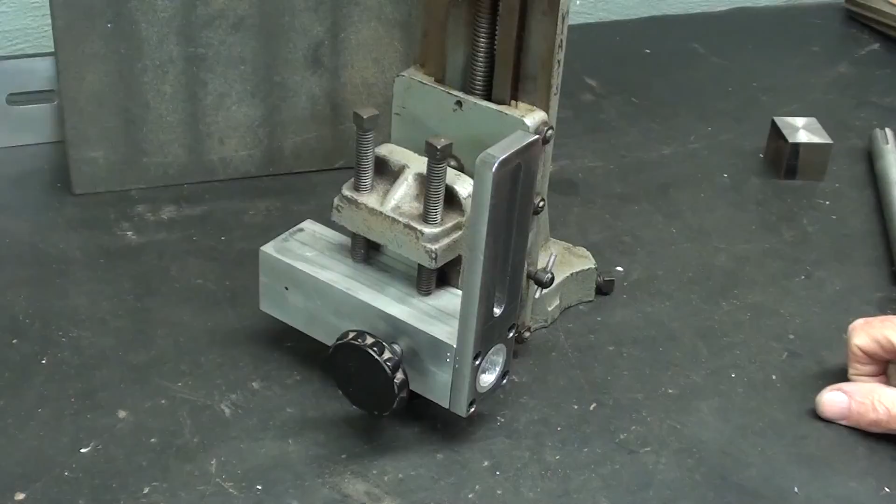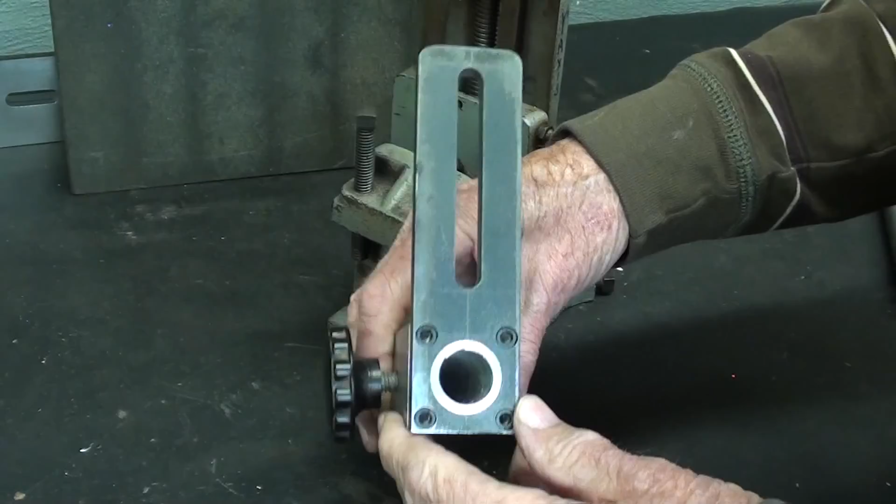Here is the partly finished project. I've done 2 parts, so this is part 3. I made the housing in part 1, and the slide part in part 2. Today there's about 3 or 4 more parts to make, but I'm going to make the block that slides in this slot, as well as the clamping mechanism on the back side. So there's 2 little projects in one in this video.

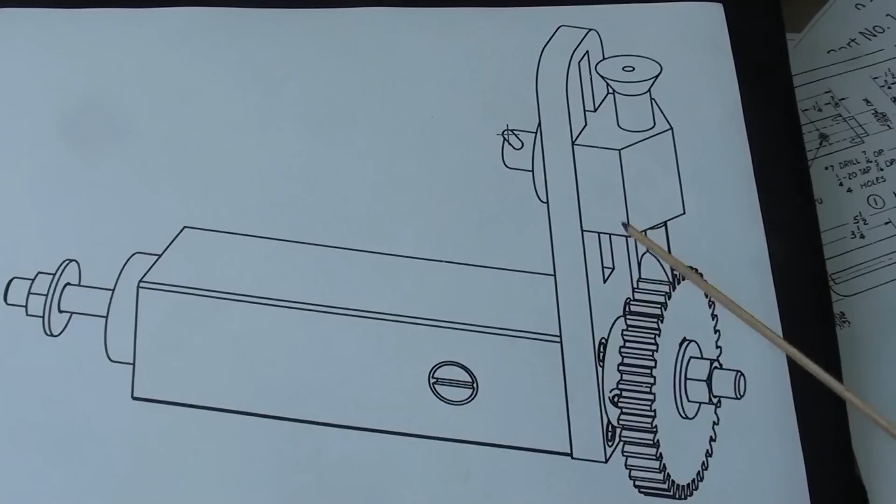Let's go over and take a look at all the blueprints and review. This is a drawing of the finished project. Again, the housing is already done, as well as the glide slide, and I'll be making the index pin guide right here today along with the clamp on the back side.

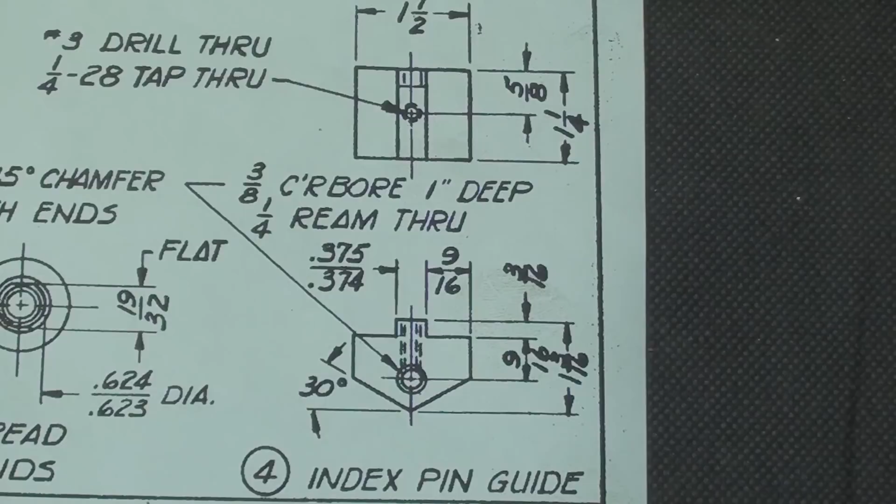Now let's see some dimension drawings. Remember, there's 3 sets of drawings, all shown in part 1 at the end of that video. Today I'm making the index pin guide, so there's just 2 views of that dimensioned, on the Casting Specialties drawing. Let's take a look at the original Atlas drawing.

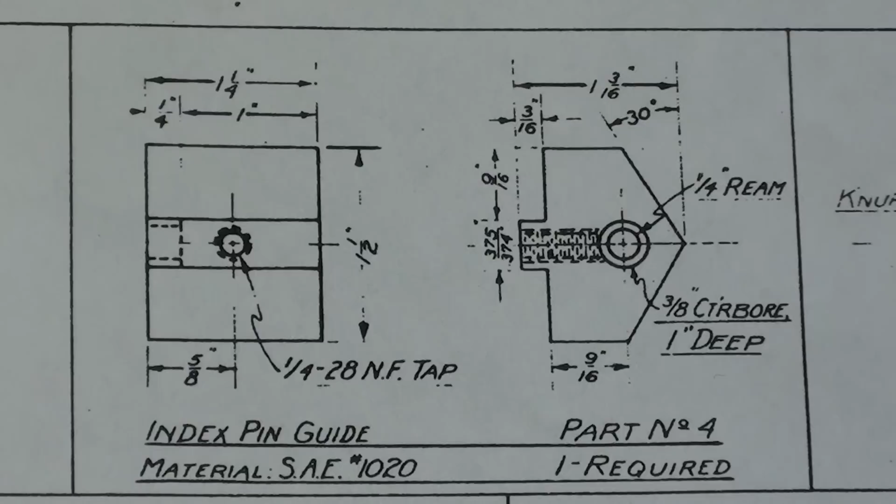I should have shown this as well. This is the guide block in 2 views, which I will be making today, but I will be modifying or varying from this actual drawing. Here it is, shown on the original 1939 Atlas drawing, and the guide block shown on the original Atlas drawing.

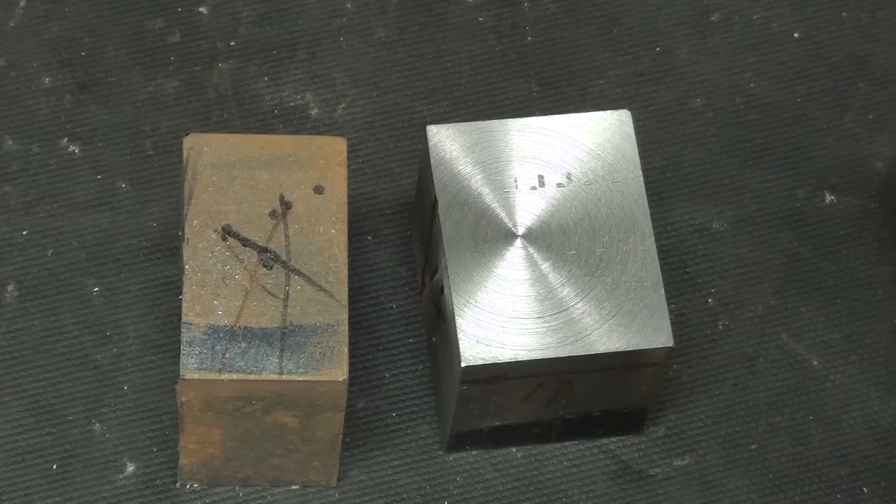I started with a piece of square 1.5 inch cold rolled steel that looked like that, and I cut it off to length, and I've already milled and faced it, so we have 1.25 inch by 1 3/16 by 1.5 inch. So I won't show that, you'll have to mill that down yourself.

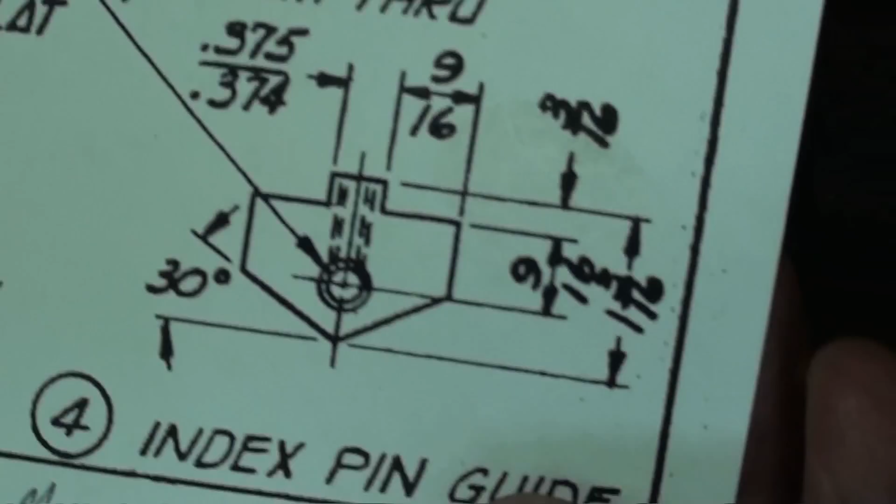Now I'm going to lay it out according to the drawing, and at least to start with, make this part here. I guess it's shown in both parts so that it will fit into this slot. Let me lay that out off camera maybe.

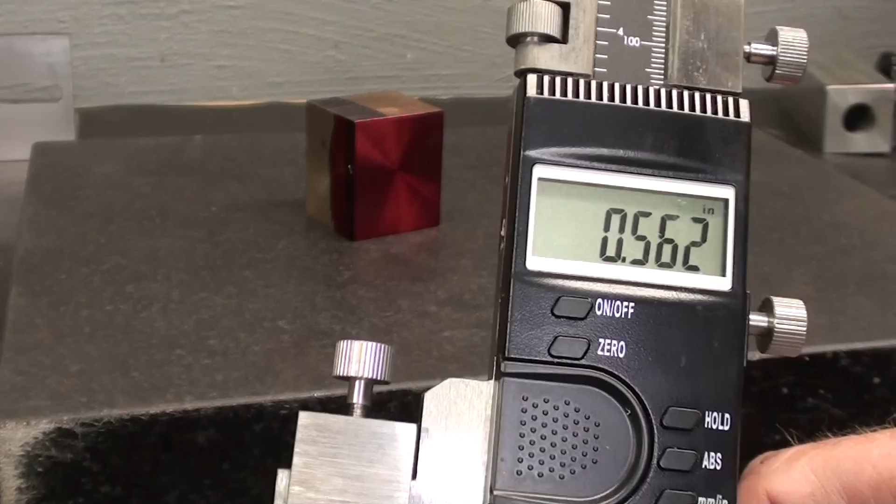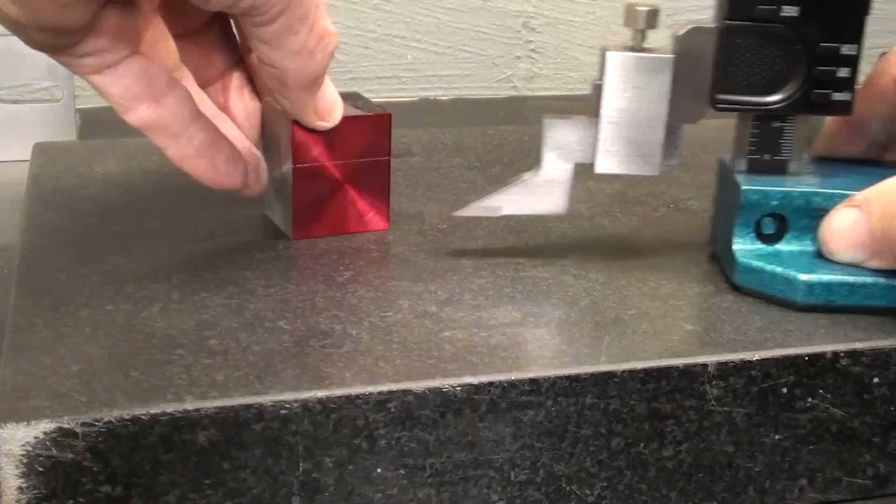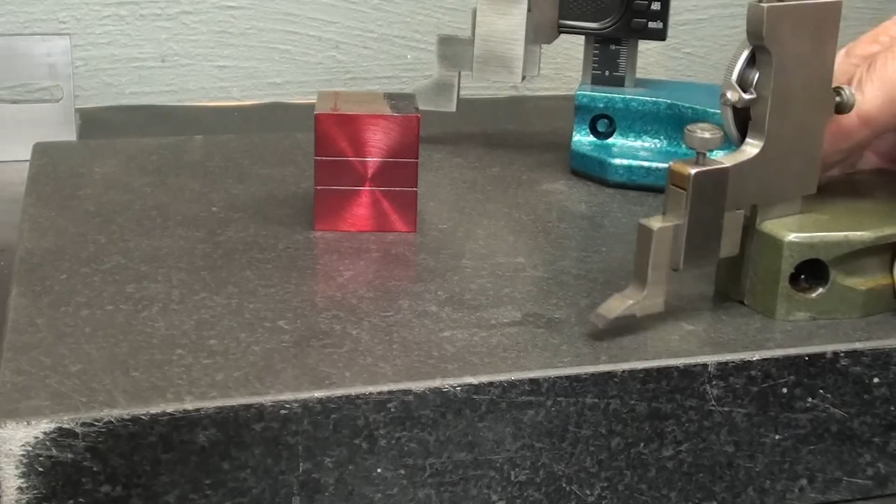I have layout dye on the work and the height gauge set for 9/16. Get yourself 2 or more height gauges, they are invaluable. And this is set for 3/16.

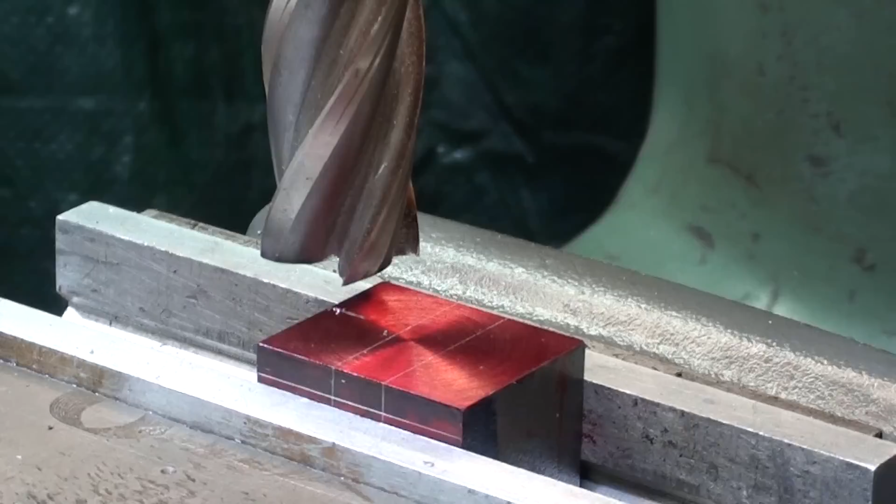Okay, I'm at the Bridgeport. The work is on parallels. I've got a 7/8 cutter in there. It doesn't really matter too much what size. I'll mill to the line, but I'll approach the line slowly while I measure.

But to start with, I'll set the depth of the quill. So I'm going to come down, touch off, lock the quill, back off, and raise the table 180 thousandths. That isn't the final depth. And here we go.

Okay, I raised the table to the final depth of 187. I should have done that to start with, and this will be the last pass on this side, which should take me to the line. And I'm climb milling for a better finish.

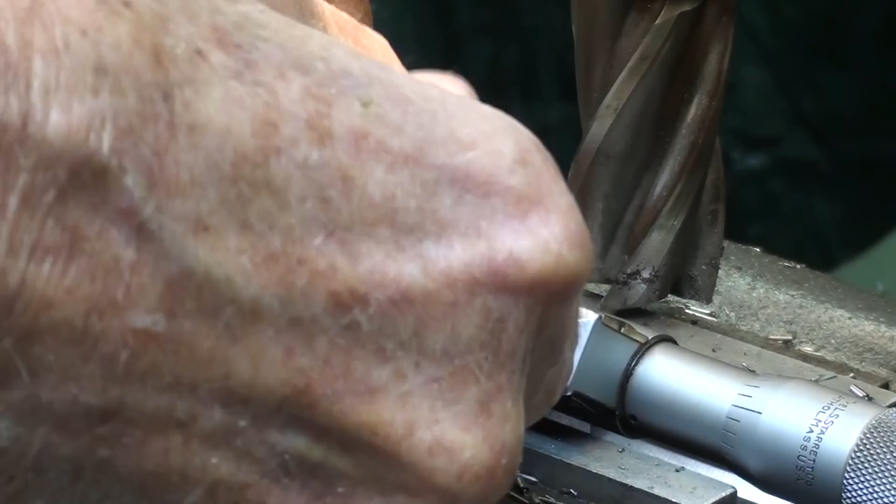Some of the footage will be sped up. Okay, I'm getting close, check with the micrometer. I'm at 381, so there's 6 thousandths.

I'm going to zero out the digital readout and move 6 thousandths with the table in the longitudinal direction, and this should be my last pass. Matter of fact, I'll just move it 5 and measure it and also check to see if it fits the other part. Creep up on those dimensions and wear your safety glasses.

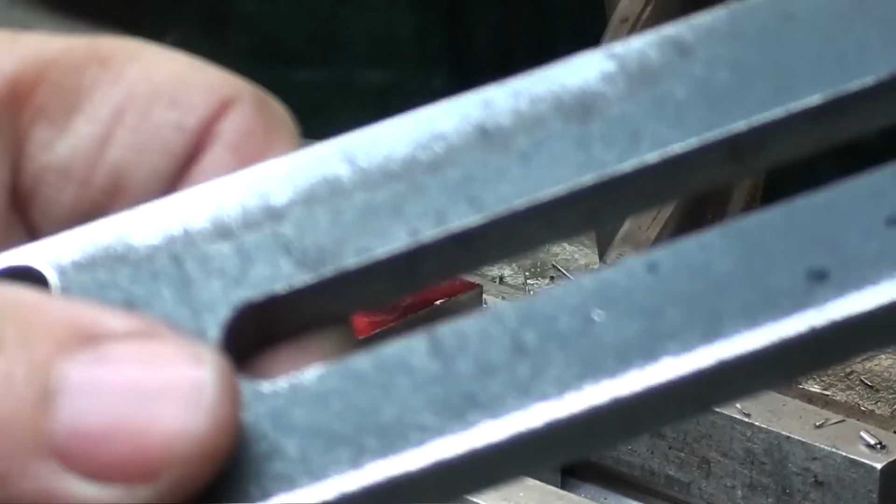Always turn your machine off when you measure. I'm about 374 actually, so let's try the piece, see if it goes on. And it does. Matter of fact, it's a nice fit.

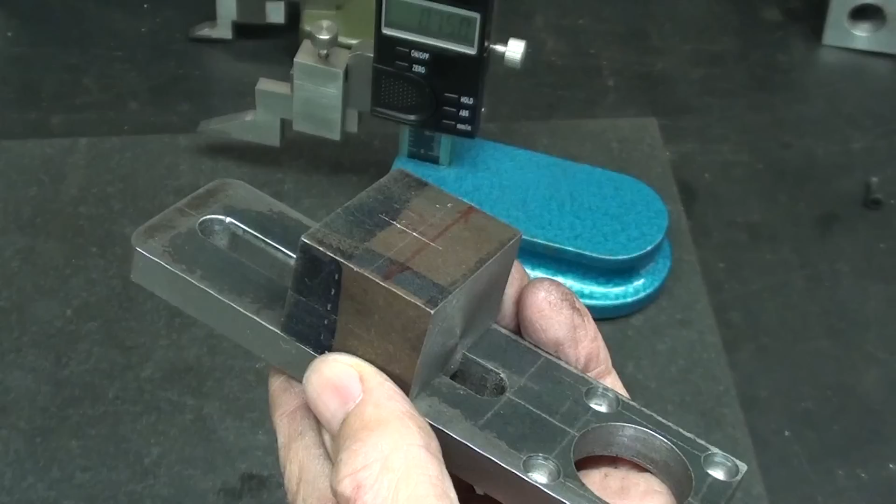Okay, I can take it out. Now, if I had laid out the other hole here to drill, I would probably do that during this setup, but to be honest with you, I forgot. I have to admit, that is a perfect fit. I did touch it up with a file here just a little bit, and now I got the nice sliding fit that I wanted. Now, I can't understand their design here, why they only went 3/16 deep. I guess it's plenty, but I would have thought they would have made it a little bit deeper this way. Doesn't matter, just my thought.

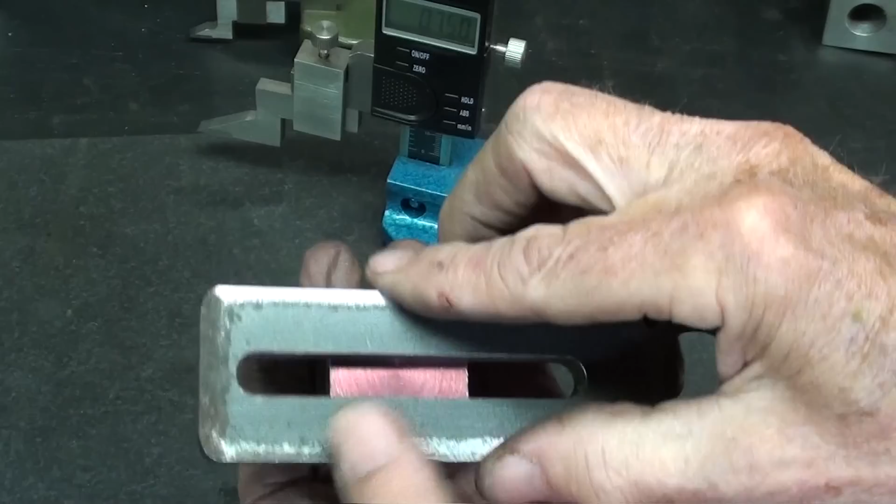Now I've already laid out the hole. Can you see that? I haven't center punched it yet. I might do that on the mill, haven't decided yet. I did lay it out with the height gauge. Did you watch my video on the world's most accurate height gauge? Question mark. But it wasn't this Chinese-made one, although this is pretty good.

Well, I laid this hole out without the benefit of layout dye, but there's several layouts on this side, so I am going to do it like this. And this.

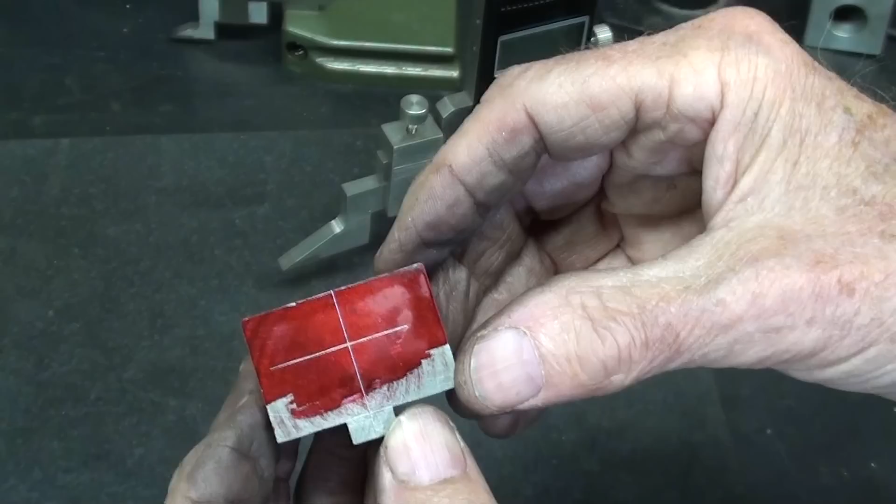So there's another hole to be drilled right there, and the two holes do connect. They are different sizes. I'll talk more about them in a minute, but you got a little bit more layout to do here, and that is the angles.

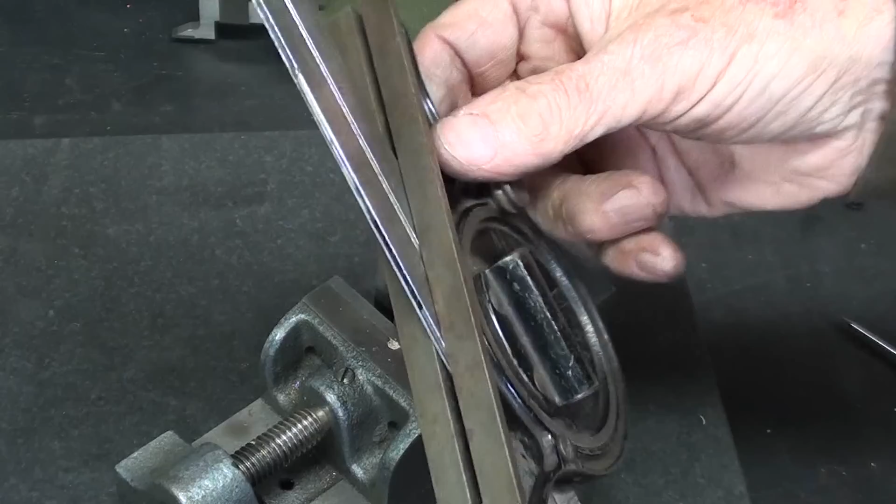I'm laying out those 30-degree angles, so I'm using a Starrett protractor here, and they make two different kinds, but if you have the kind where the blade runs through the head like that, you don't have to change it. Set it at 30 degrees, mark one side, and then flip it over and you can mark the other side. So I do prefer this one, although it's bulky, but you can use whatever you got.

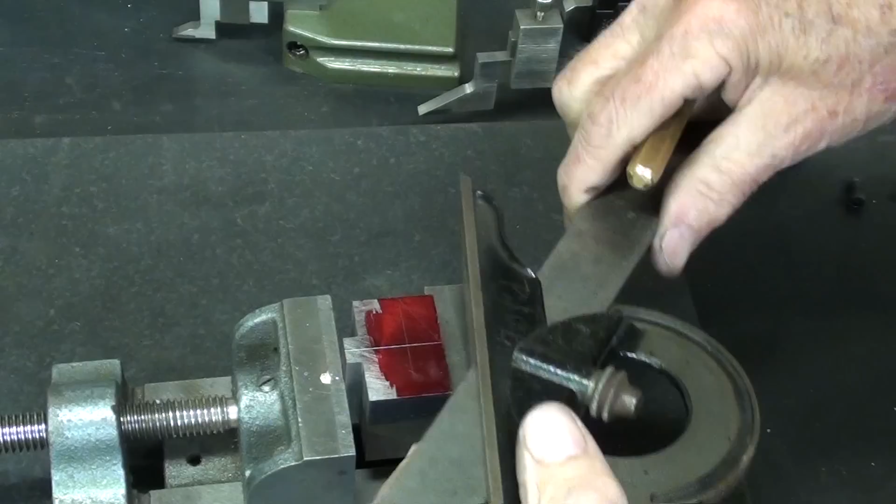There's a better shot. I deepened and darkened the lines just a little bit.

Back to the Bridgeport. Now, you do not have to do all your drilling on a milling machine. You can use a drill press if you want. I prefer to do it on a milling machine. It's just so much more precise.

And off camera, I use the edge finder to locate the hole. Even though I already had a layout, I often do double duty like that. It prevents a lot of mistakes, and I'm doing it for instructional purposes as well.

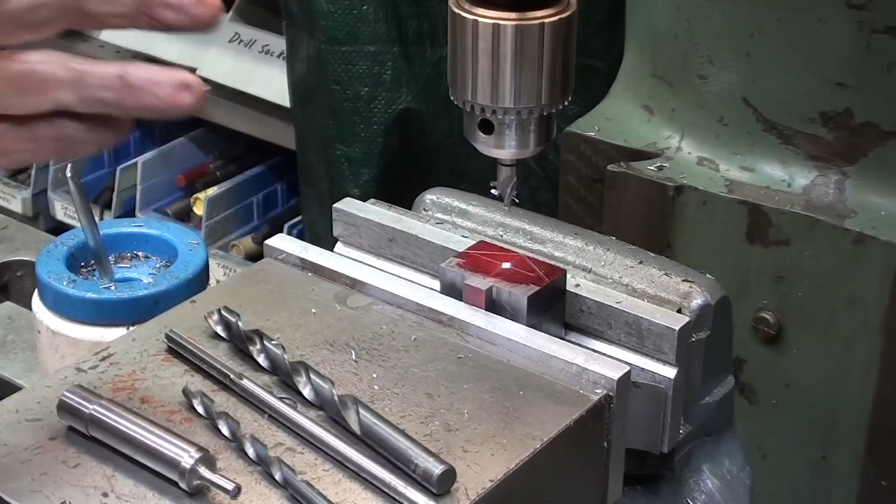So with the center drill in there, I will go ahead and spot the hole. And when you do that, you can see that the tip of the center drill, or I can see the tip of the center drill, was exactly on the layout line. So it's kind of a double whammy there for protection.

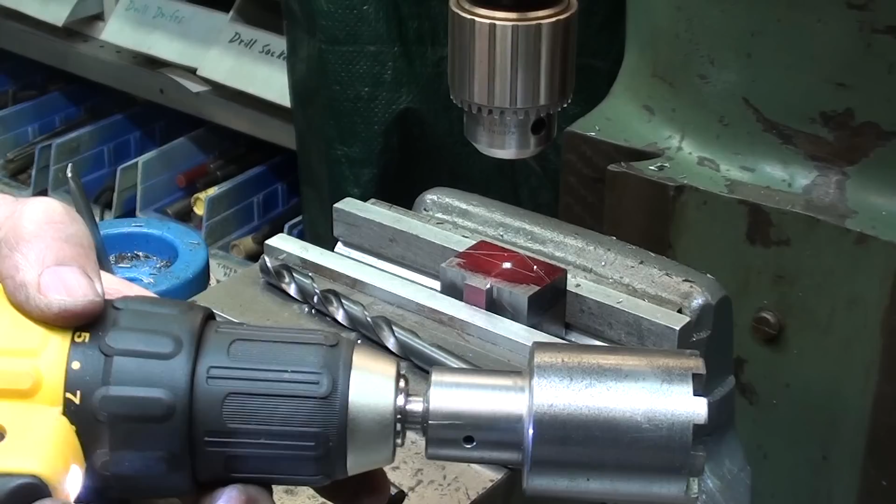Lately I've been using the DeWalt drill with this that I made years ago, and it's just so much faster to raise and lower the table. Like that. Takes some of the pain away, doesn't it?

Don't drill into your parallels. Ask me how I know. Leave a comment if you want.

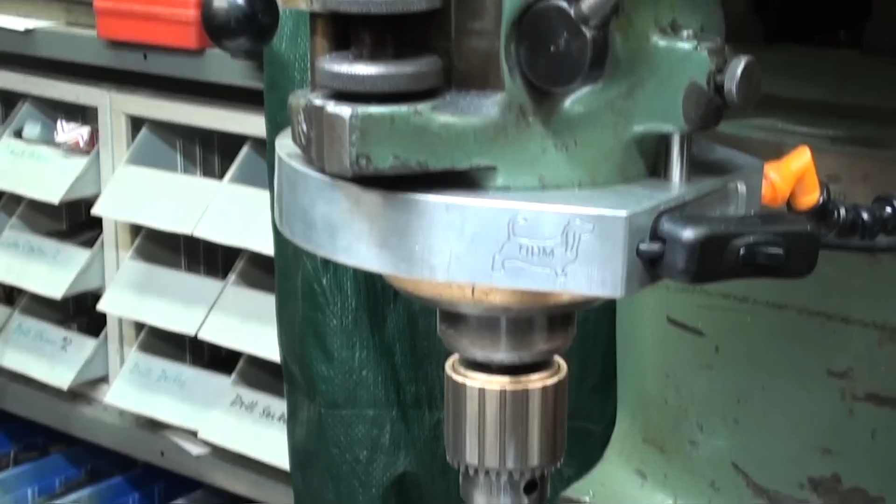Now a 3/8 hole, 1 inch deep. So look what I've done here. I come down and touch the work. There's so many ways to do this, and I'm using a Jo block simply because I have it to space it out. It doesn't need to be accurate, and that's overkill, I know. I'm just showing you different ways of doing things. And let's drill.

Now I will ream 1/4, the balance of that hole. I don't know why they're calling for reaming. It's probably overkill again. Done.

Well, now I have one more hole to drill. But Mr. Pete, why did you lay it out on that side? It should have been on the other side. Well, I know. Well, you weren't looking. I relayed it out on the correct side. I told you that I'm certifiably incompetent. So let me set it up, and I'll be back to drill that hole presently. Using the edge finder, I located the hole.

The drawing calls for a 1/4-28, which is a fine thread, so this is a number 3 drill, and I'm drilling down until it meets the other hole.

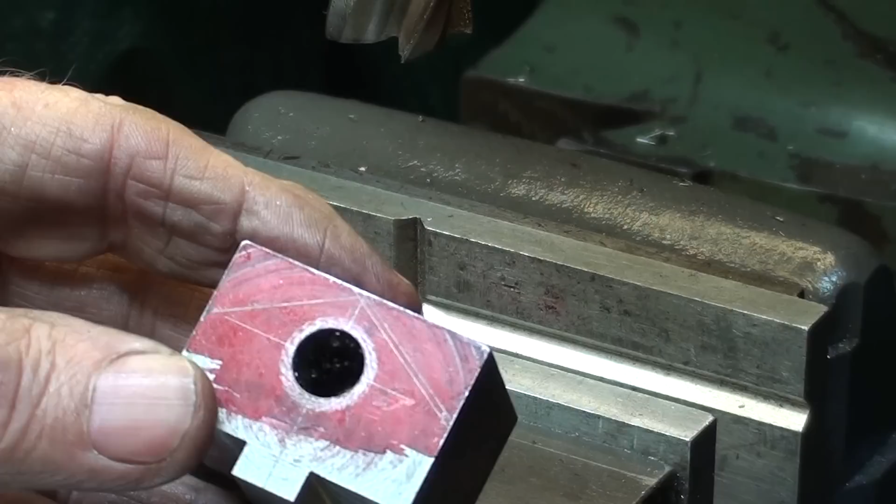This old shop teacher is just about done with this piece except for milling those 2 angles on there. Now I've laid them out at 30 degrees, and they will meet up there at the, is that the apex? I'm not sure.

But rather than just use the layout lines, I'm double checking everything, I guess. I don't want to have to do it over. This is a 30-degree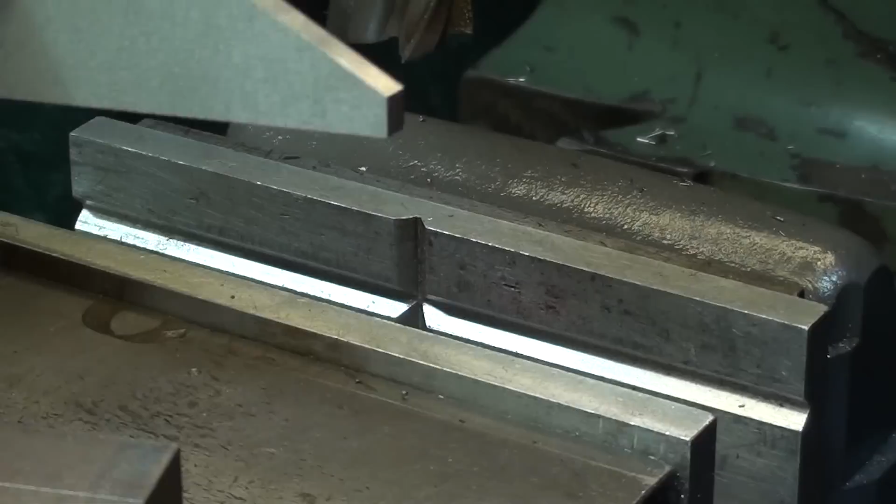angle block. So with a clean vise, laying that down in there, I will attempt to, if I can get my hands out of the way. Actually, I need 2 hands, but the whole idea here is I'm resting this on the angle plate, and it's a little bit wobbly because I'm only catching it on a small portion. Maybe I should have done that earlier.

And then I'll tighten the vise down, and I'm ready to mill, and I'll just show one side. Did I say that already?

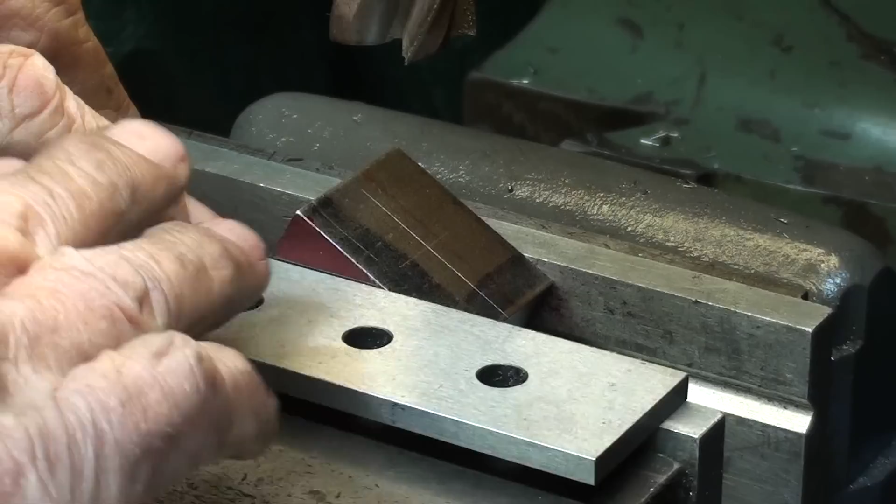And the alternate way of doing that, if you do not have angle blocks, and you probably don't, is you can see the layout line there if it's accurate, and lay a parallel or a rule or whatever is the right thickness until you get the layout line parallel with the spacer. This has to be a spacer because you do not want to hit the vise with your cutter, so the layout line is above the vise.

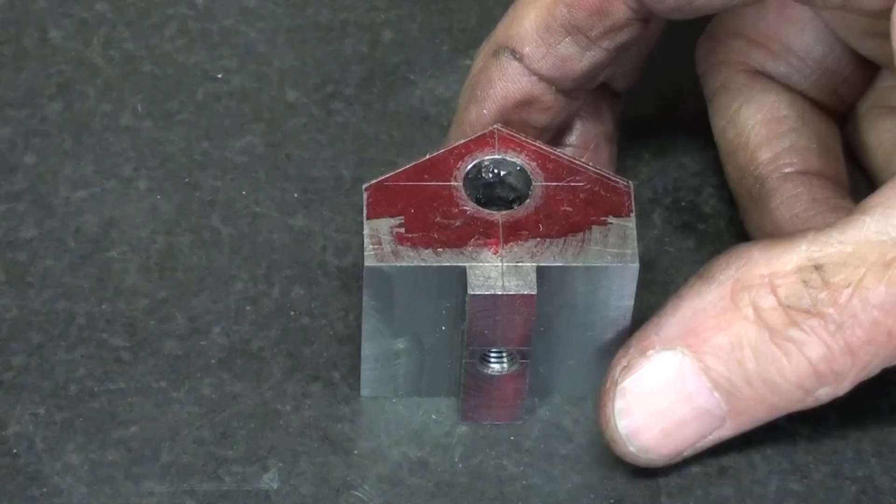Okay, that's it. I'll do the other side off camera. Identical. Well, there it is. Looks good. It looks like a red barn with a round hayloft, doesn't it? Kind of cute, cozy.

So I will deburr and clean it up, and this is done. Again, this is called the index pin guide, and in the last portion of the video, I will make that other lock. That should be rather simple compared to this. Hope you enjoyed the video so far.

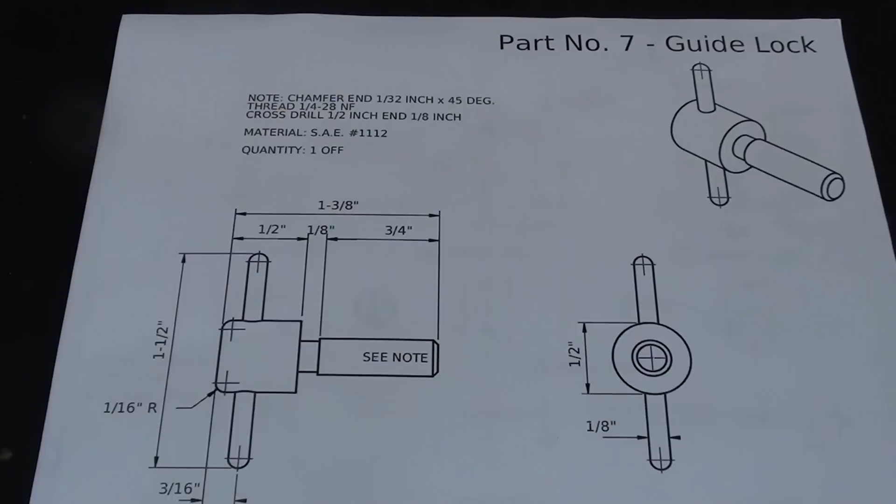Okay, for the second part of this video, I'll be making the guide lock that looks like this. And here is a dimension drawing, and I'll show you the other two drawings right now as well.

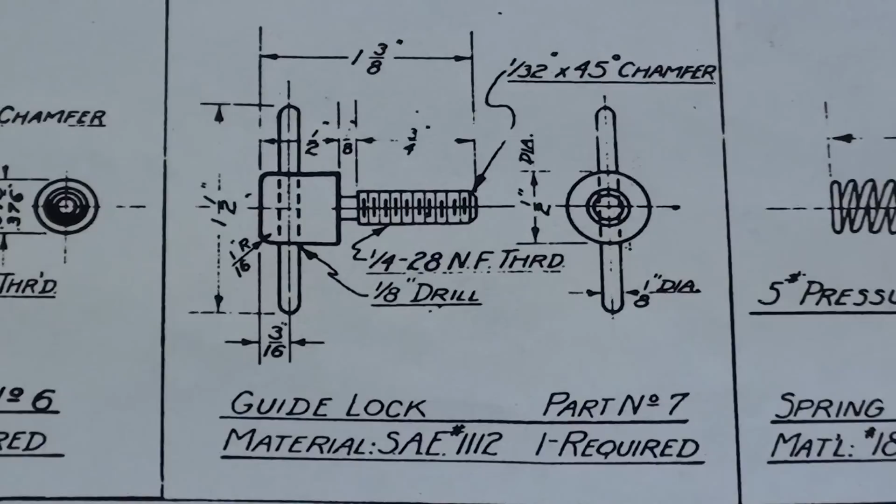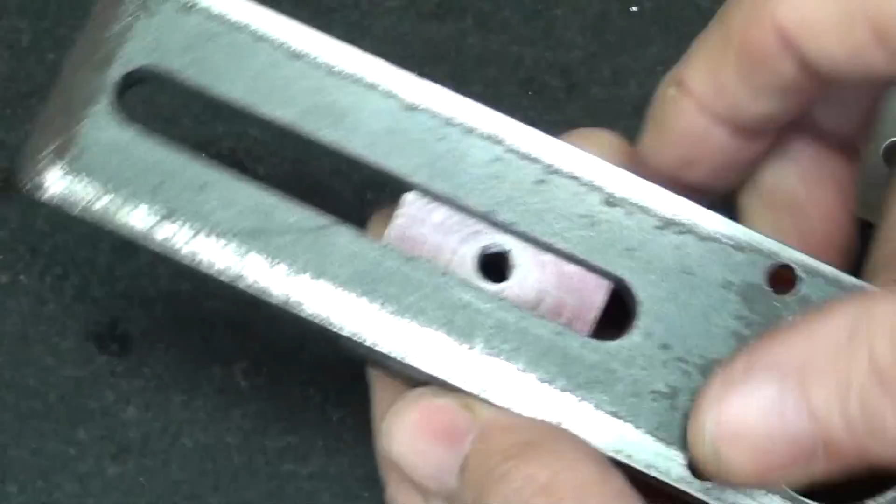This is the Casting Specialties version, and here is the original Atlas version from 1939, and I might vary just a little bit from all of these prints. So the whole purpose of this part is simply to lock this into position, and in fact you probably wouldn't even need to make this part.

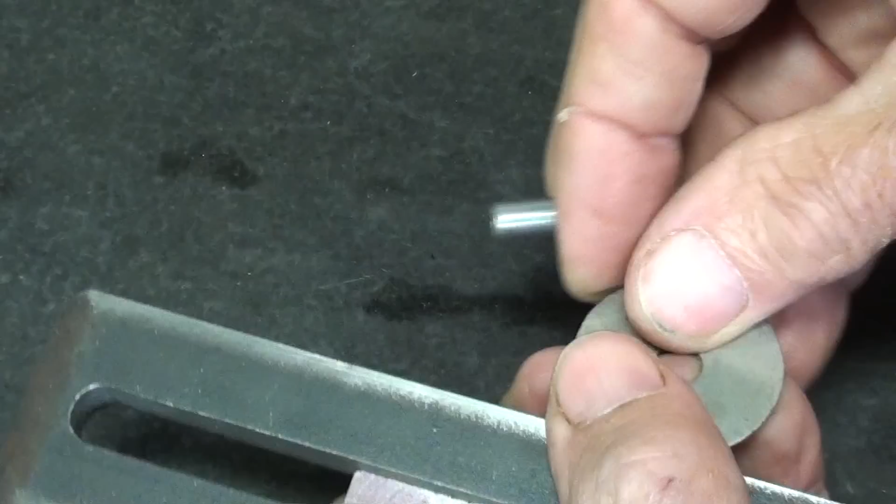You could just use a 1/4-28 cap screw. It would need to be a little shorter than this, and when used in conjunction with a fender washer or maybe two washers, you could lock this into position, because in fact during each setup you only need to lock this one time. It isn't something you're constantly doing throughout the job.

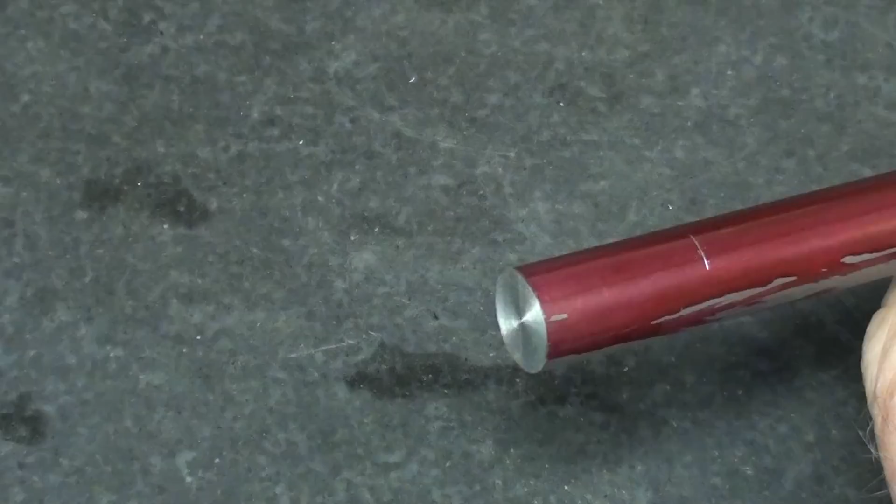This is 1/2-inch leaded screw stock. I just love using this material. I always paint it red on the ends so I can identify it. And I've already laid out a line here, 7/8 from the end, and I'll turn that down to 250 thousandths,

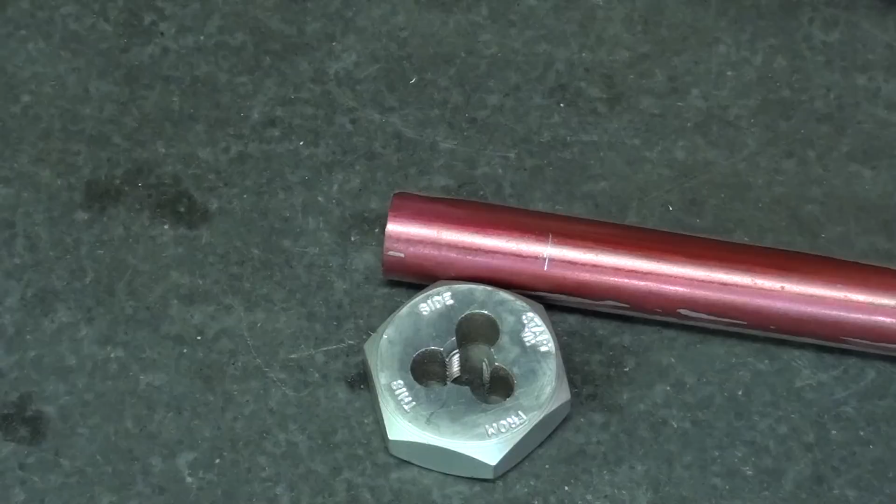and I'm going to thread it on the lathe using a die like this. Now the drawing calls for an undercut there. There is no need for that. The purpose was so that you could thread close to the shoulder, but since we're using a washer and the

fact that this part is recessed a little bit, really eliminates the need for that undercut, which is a weak point and a pain in the neck to make.

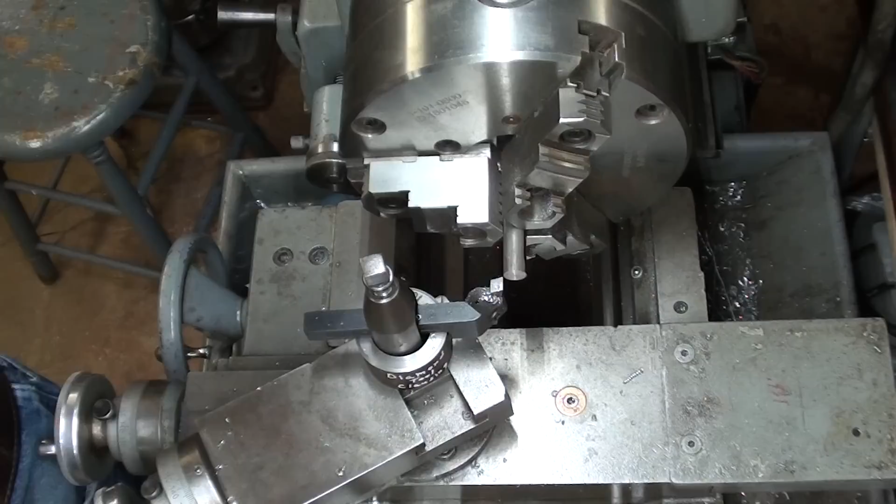Again, I'm using that wonderful diamond tool, and I'll take it down to 1/4 inch. I have a stop already set.

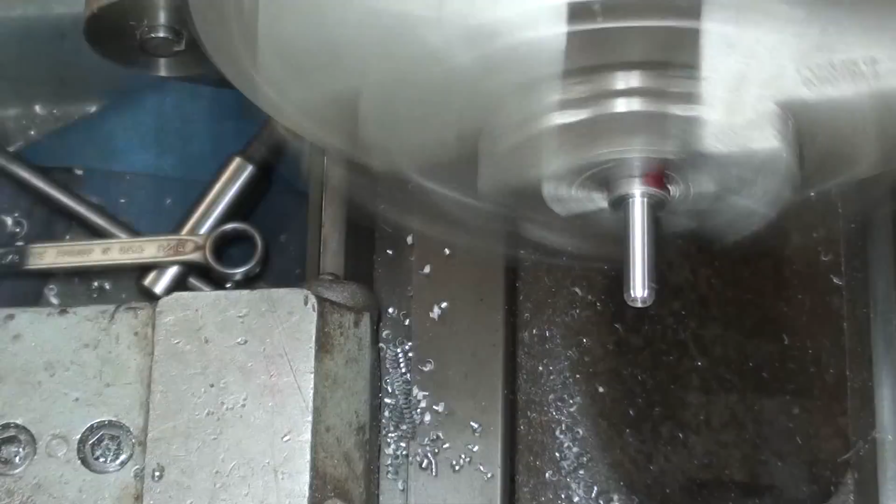I love this method of putting a thread onto small work using the die, this time in the headstock, because it's a hex die, and the workpiece is held in the Jacob's chuck in the tailstock. You cannot see that. Do not clamp the tailstock. It must be free to slide.

I'm in back gears, low speed, and I'll be using generous quantities of oil. It's also important to note that on every die there is a side you should start from. Sometimes it is marked, like this one says start from this side. If it's not marked, examine it and look at the tapered side - that will help you greatly.

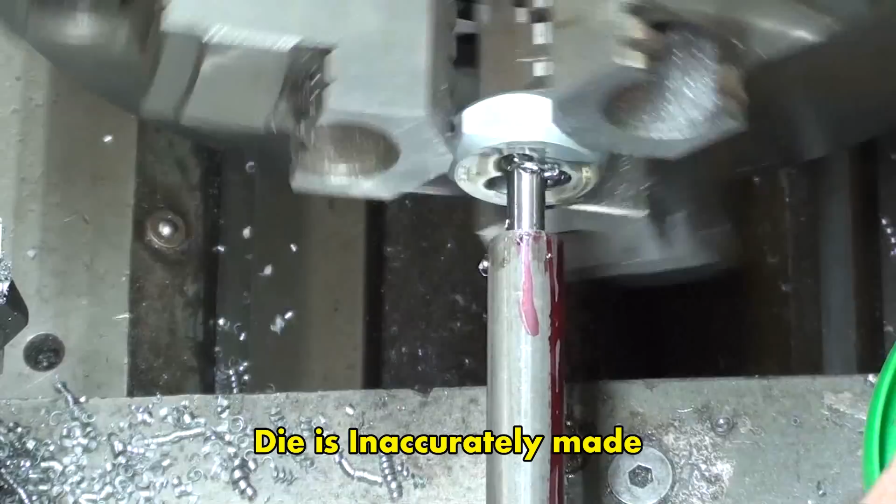You'll also note that I chamfered the end of the workpiece. And now, back it out in reverse. I'll speed it up as I do that.

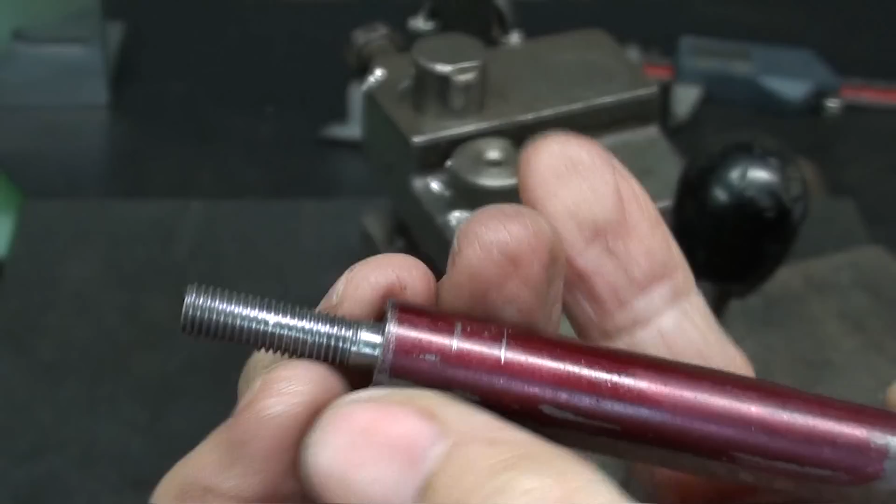How was that? See how nice that thread turned out? And it didn't go all the way up to the shoulder, and it will not matter for this application.

Now also notice that I have not cut this off yet. Don't cut it off and paint yourself into a corner. But this mark is where I will cut it off when I'm done. But we need a cross hole in there on that mark as shown on the drawing, and that's to be an 1/8 inch hole. Now everyone has their favorite method for drilling a cross hole.

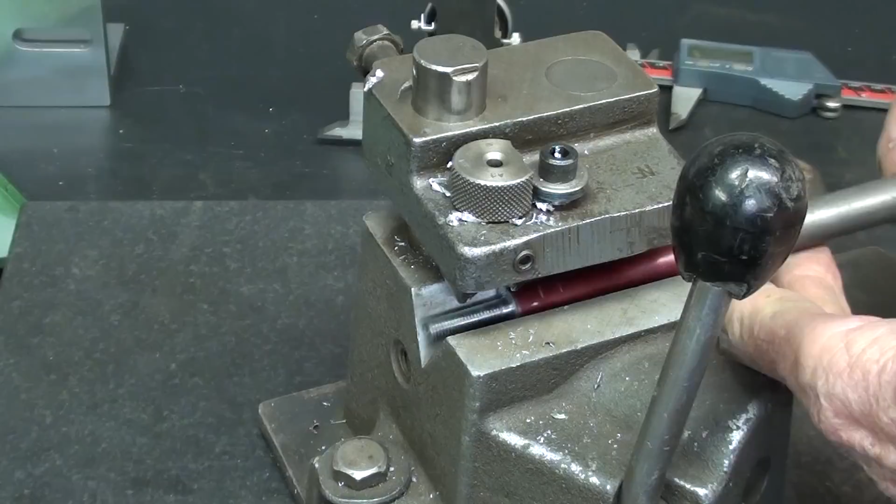I'm going to use the ever popular Heinrich cross hole drill jig, and that's an 1/8 inch bushing. I'll drill right through it, and it will perfectly center that within the shaft. Make sure you go to an effort here and don't just freehand it, because you can never get it on center and you spoil the work and it looks ugly.

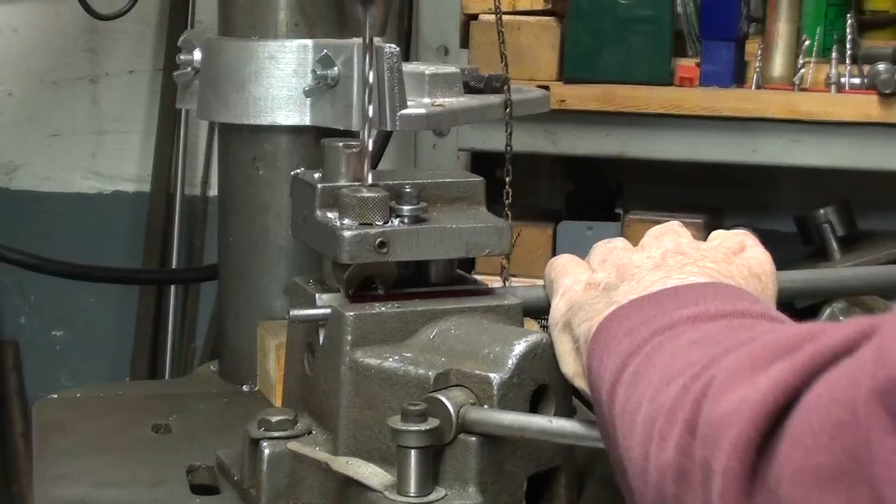Okay, it works every time. It gets you right on center. There's the 1/8 inch bit. Get yourself one of those, although they're probably $1,000 if you could even find one.

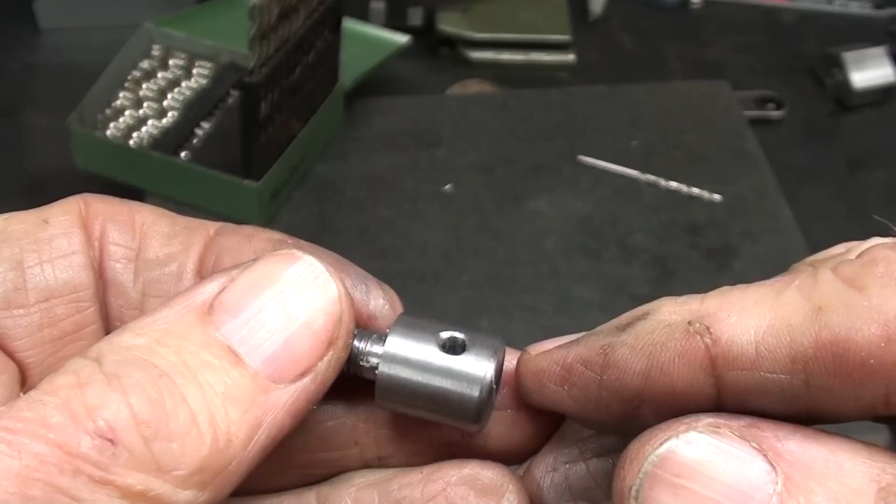Now the game plan here is I'm going to cut it off on the line, put it back in the lathe, and face and chamfer the end. Then in the drawing it calls for a piece of 1/8 inch rod pressed in there or held in with Loctite, but I'm going to use the ever popular 1/8 inch, 1.5 inch long roll pin or spring pin, whatever you call them.

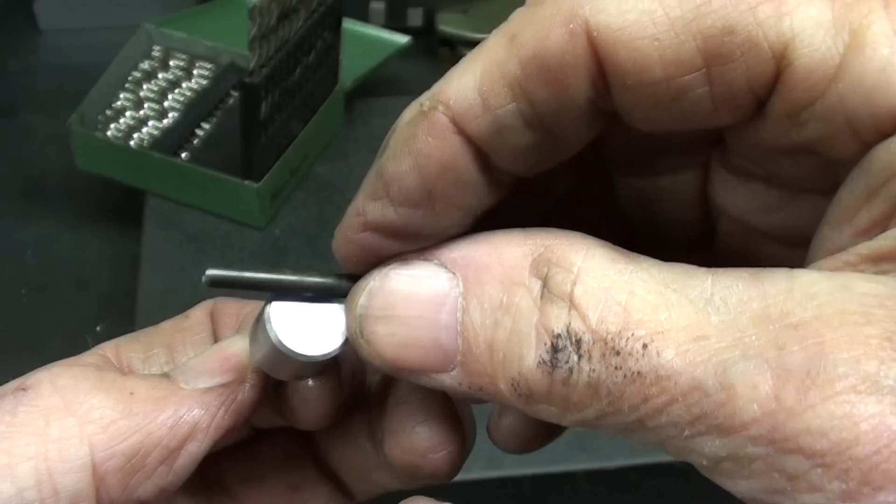Okay, it's faced to the layout line, generously chamfered, polished a little bit, and countersunk there to help me get this started. I'll put a drop of oil on and drive this in, hopefully without putting any marks on it, to about the halfway point, and I'll be right back. For best results, use your Vaughan 16-ounce ball peen hammer and your Starrett bench block and drive it home.

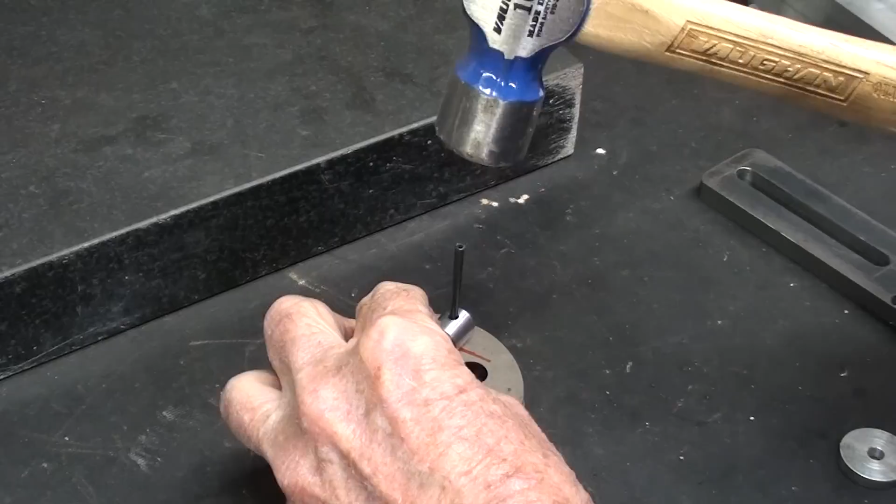You know, I had a laugh. When I was 10 years old, I'd be making a model airplane and we had the wrong kind of glue. I said, Mom, the directions say for best results use Testor's glue. And she says, nonsense honey, they all lie, it couldn't matter less what glue you use. It is a commodity.

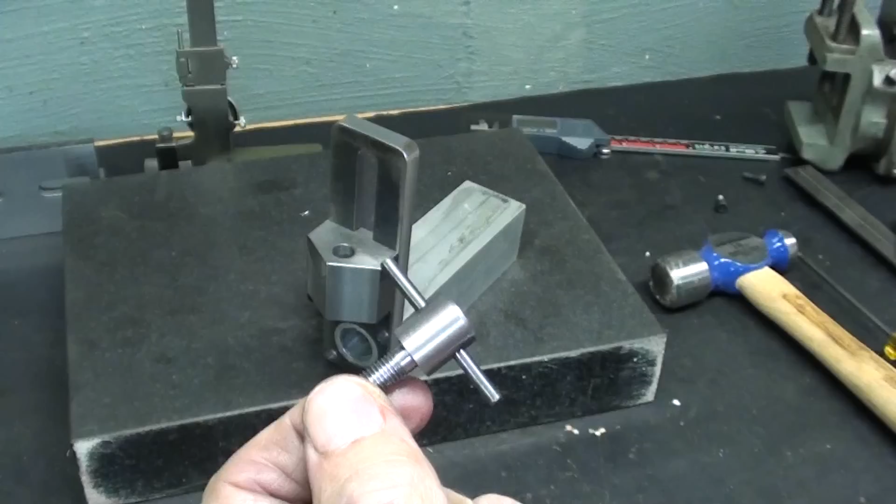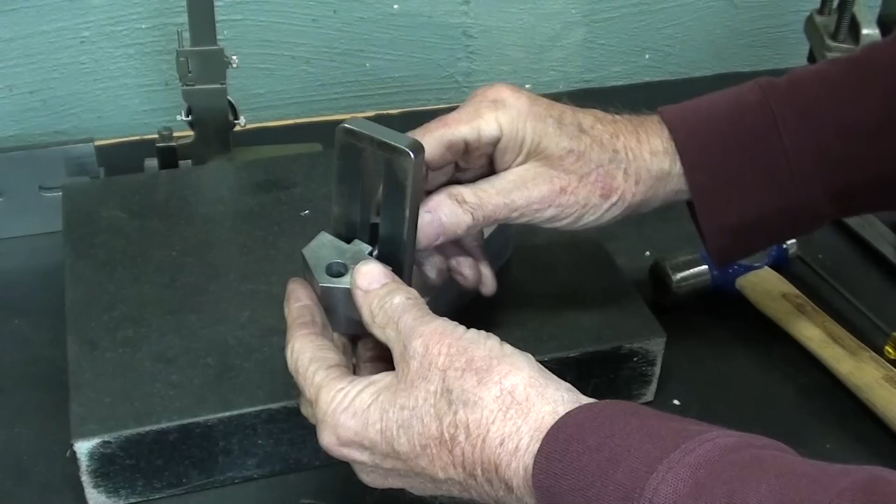Well, there it is. Let's fit it up and see. Now again, you can use any washer. I just happen to have a couple of these in stock left from a job with a 1/4 inch hole, but it is aluminum. I don't think it could matter any less, could it? And now you will see why that undercut was redundant and unnecessary. But for best results, yeah, right.

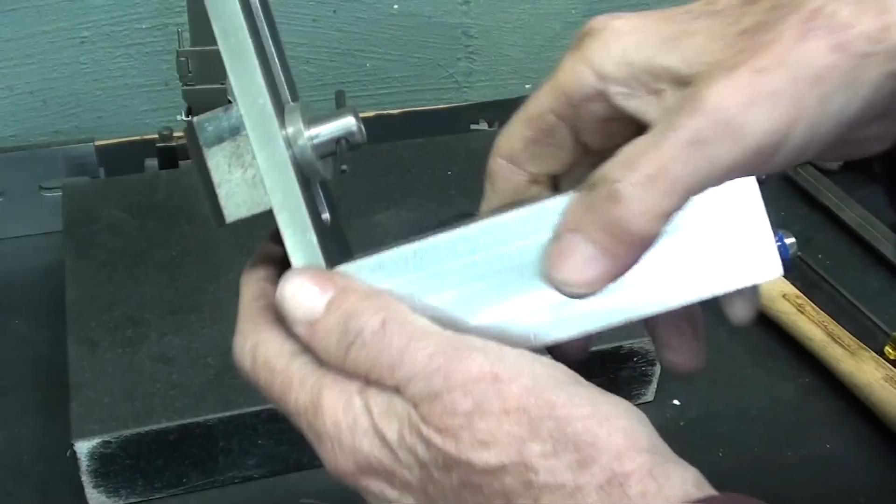Looks pretty nice, doesn't it? But do it any way you feel like. Not sure I like that big cloddy old knob on there. I might change that at a later date.